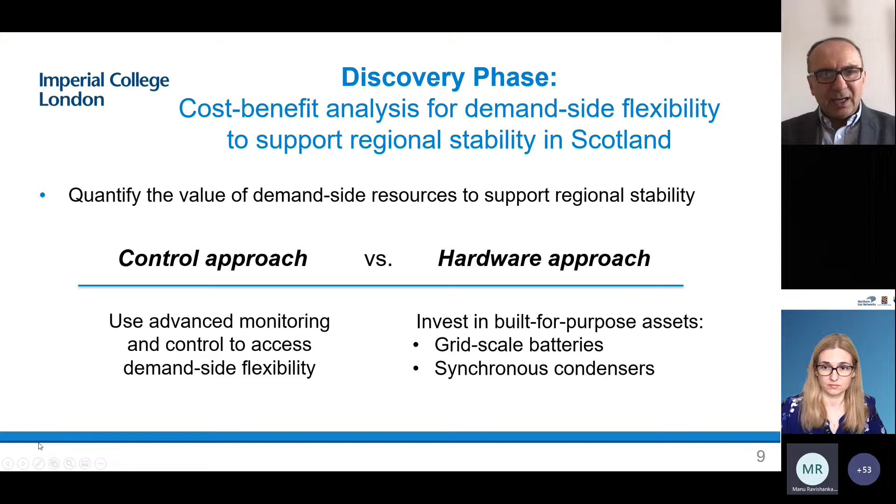So the next slide just shows this - the regional frequency stability.

This is a big issue, and obviously this is also driven by the fact that this is a reduction in system inertia because we've got renewables, and also there's this HVDC connection, and in Scotland this is just an assumption going to be 1.4 gigawatts, and if that fails, then that will be a problem.

You can see at the bottom right these diagrams, the red and blue ones, showing the difference in frequency changes, so they're not the same, and the red one is in Scotland. You can see that the rate of change of frequency in Scotland, if we lose generation or this interconnection, would be bigger than in England, and if we ignore this spatial variability, we would potentially have a higher rate of change, and this could potentially lead to blackouts. This needs to be addressed strongly.

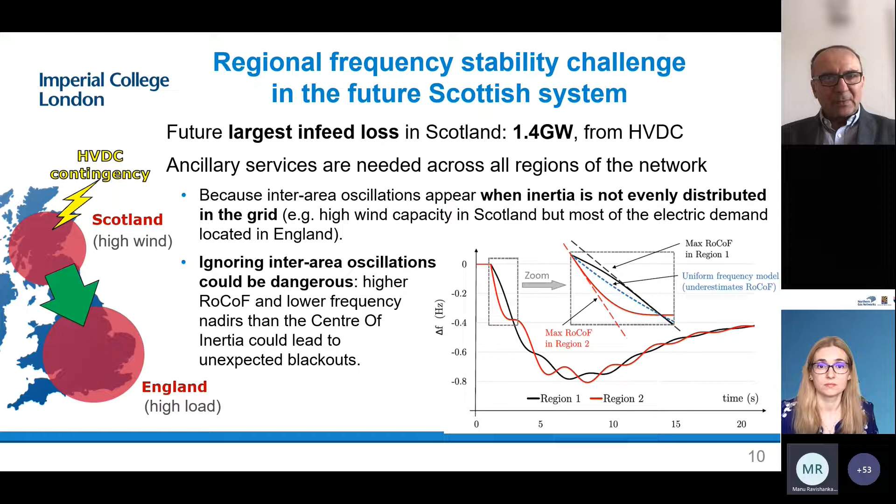So the next slide is just quickly showing that we use our ancillary services constrained energy scheduling model, which is a very advanced modeling approach.

One of the core challenges being solved with this modeling is to optimize the system operation, looking at timescales of hours, because if you want to switch generators on and off, that takes time, but at the same time looking at the ancillary services dynamics, which is a millisecond timescale. Putting this together is where this model is pretty unique.

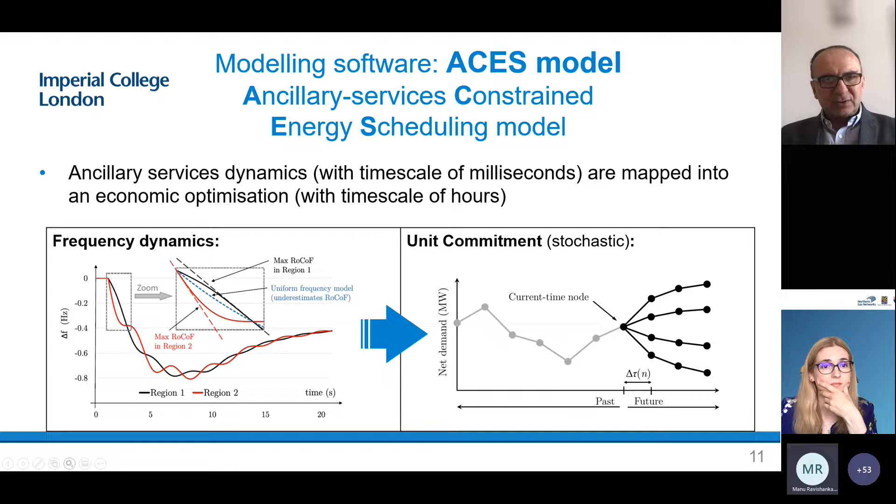We have also updated the model to include demand side response and this spatial distribution of frequency changes. So if we go to the next one.

In this ACES model we have expanded it to include regional demand side response, because that is very important, along with characterization of those. The current profiles consider electric vehicles and heat pumps, and we used National Grid's scenarios focused on 2030, so this was based on those scenarios with the analysis focused on 2030. So we go to the next slide.

This is showing the core results of the modeling. The value of having this fast flex concept in Scotland is about 440 million pounds per year, and that's all to do with, as we discussed, there being less investment in conventional grid, but these are the benefits which this concept can provide compared to synchronous condensers or battery storage, which is, in inverted commas, the conventional approach.

This was done based on the analysis of zero carbon operation in Scotland. We estimated there was about 1 gigawatt of demand response from electric vehicles and heat pumps, and that demonstrated it could replace 10 gigavolt amps of synchronous condensers and 500 megawatts of battery storage, which is obviously very, very significant.

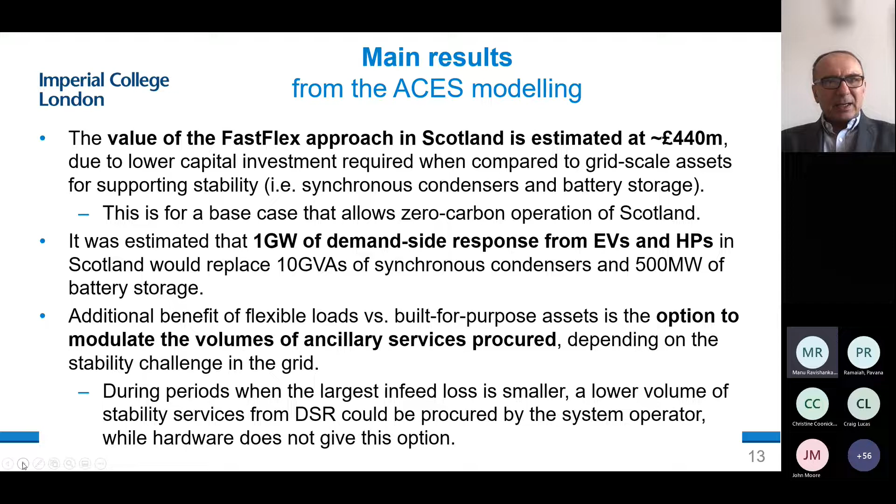This now demonstrates there are very significant benefits, and that needs to be included in the analysis going forward, because that has a very significant impact.

But of course, what was also demonstrated is that the electric vehicles and heat pumps being used for this, we would potentially need much more, because the value, even if you increase it, doesn't reduce, which means there's a significant amount of this required. That's not regarding the options for 2030 alone, which would not necessarily be sufficient to fully guarantee stability, and that's where other concepts need to be included and looked at.

One option is vehicle to grid, because if we could potentially inject power when there's a large loss instantly, that would provide frequency stability, which would be very useful to include.

There are also other loads which could support that, like refrigeration in supermarkets, which can provide some of these services. That's something useful to understand in the next phase of what the fast flex scope would be. The focus is on understanding the benefits of this additional demand and these different options of demand side response, and what the value of those is.

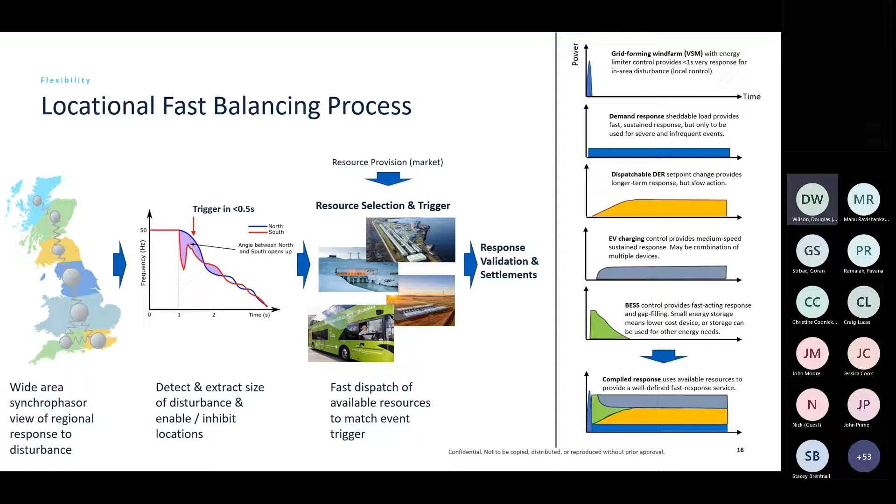There's already a suite of services in place, including physical inertial response, mainly provided by large generators with a lot of inertia, though that's shrinking, which is the source of our problem. There are frequency response capabilities, both traditional and newer forms like dynamic containment, helping to shift the response faster, but those responses don't yet include a locational element into the frequency service, and that's part of what we're doing.

At the dispatch end, slower control using demand side flexibility is used in centralized balancing, but that's quite slow. What we're aiming to do is put this flexibility together with a fast detection and triggering approach, so we defend the system against large losses from interconnections, large generators, or large loads. The focus is this new service applying in the middle, between proportional frequency regulation and dispatching to balance the grid longer term. This is the new service.

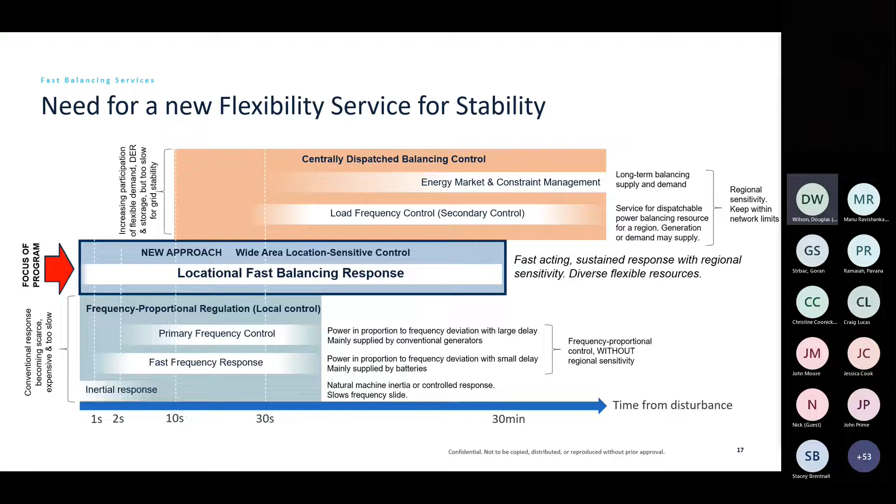So as we look to taking this a stage further, there's an infrastructure that needs to be put in place in order to support the stakeholders to demonstrate and deliver what they're capable of.

In the lower part of this diagram, you have a measurement infrastructure feeding through. These are fast measurements - every cycle, those measurements are brought into an environment where you can run the necessary control algorithms. You then identify the conditions in which you want to draw on the resource, and then you dispatch the response to the participants.

Those participants are mainly connected in the distribution network. They're mainly relatively small units, but together you can aggregate it to a substantial response.

So as well as that technical path, there is also a system level view of how much response is needed. If you treat the overall response as a block of response available for responding to, for protecting the system against disturbances.

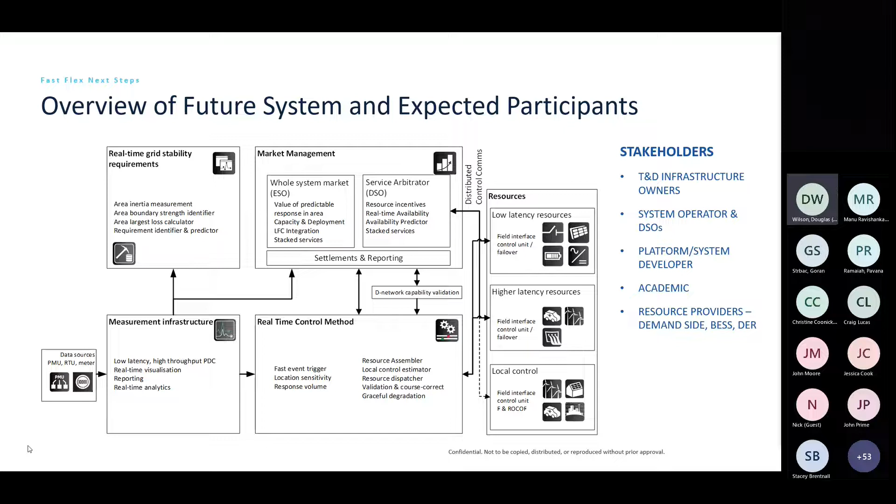So I'll stop here, and happy to take questions when that time comes. These were backup slides, so you don't need to go into those.

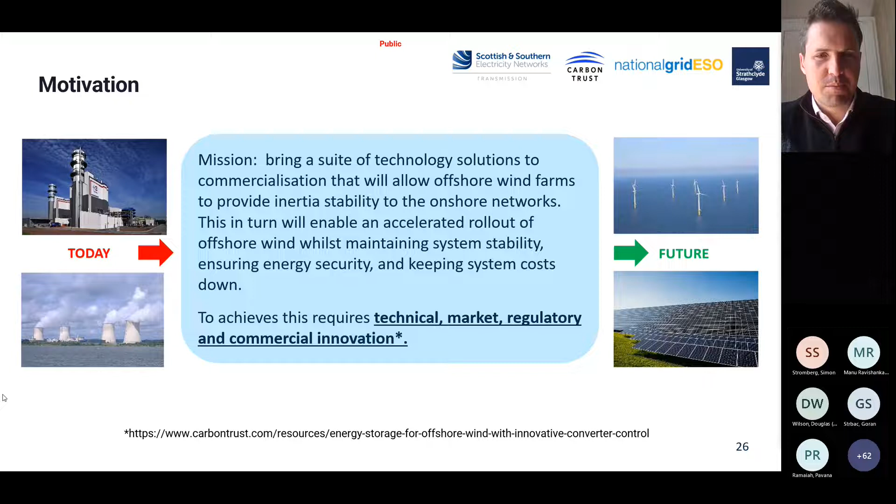Yes, next slide. You might want to just click through to populate this. I didn't realise I wasn't going to be in control.

So the first stage was to generate a long list of potential technologies. These were really every kind of technology that could be used in conjunction with an offshore wind farm to stabilise the networks, and in particular we were looking at inertial stability. What we did with this long list was then qualitatively produce a shorter list, ruling out some that were potentially of less interest for this project. They might be very interesting in other contexts, but this project is focused on the relative short to medium term in terms of allowing offshore wind farms to provide additional services to the grid.

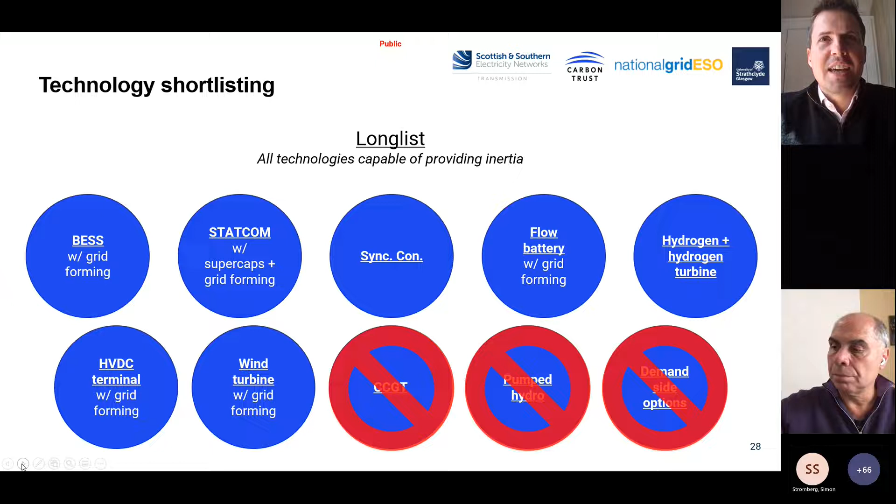So I'm going to click through. Yes, combined cycle gas turbines went, pumped hydro went, demand side options went, as did hydrogen and hydrogen turbines and flow batteries, all deemed not to meet one of those criteria.

If you click through to the next slide, you'll see that left us with the shortlist for assessment and discovery. Maybe just talk to those briefly. There's battery energy storage with grid forming, to be located at the onshore substation. There's STATCOM with supercapacitor plus grid forming capabilities, again located at the onshore substation. There's an HVDC terminal with grid forming capabilities to replace a traditional HVDC terminal for an HVDC connected wind farm. There's a wind turbine with grid forming technology to replace existing wind turbines offshore, and also a synchronous condenser to be located at the onshore substation. So these are the 5 technologies that we really focused on in discovery and continued with the analysis.

If we go to the next slide, I'll talk you through the conclusions from the 3 work packages. As mentioned, the first work package was the CBA, looking at the commercial models or commercial case for these various technologies. We took a consumer perspective for the 5 technologies, and considered the costs and benefits on an energy system level as a whole. Each technology was assessed at a nominal 50 megawatt size, selected for convenience and comparison purposes, and the timescale for the assets was taken as 25 years.

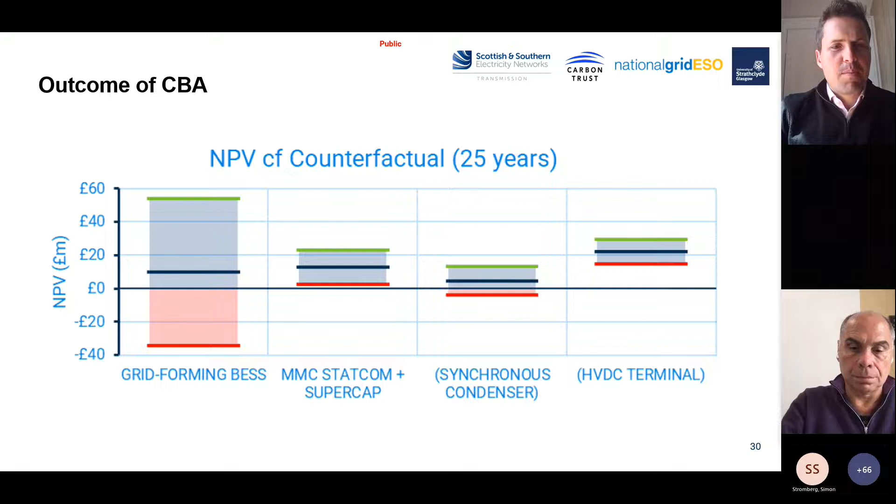If we look at regulated network company ownership, battery energy storage with grid forming at the location of offshore wind farm connections, so the onshore substation, produces some relatively significant regulatory barriers in terms of ownership of the storage asset.

Similarly, with the STATCOM with supercapacitors, there are some regulatory complexities, although potentially less so than battery energy storage. We need some clarity as to how those assets could be defined for regulated network company ownership. For synchronous condenser and HVDC terminal, the view from discovery is that there's quite low operational and regulatory complexity to be owned by a network company. In terms of the wind turbine, that's obviously not feasible to not be owned by the offshore wind farm owner.

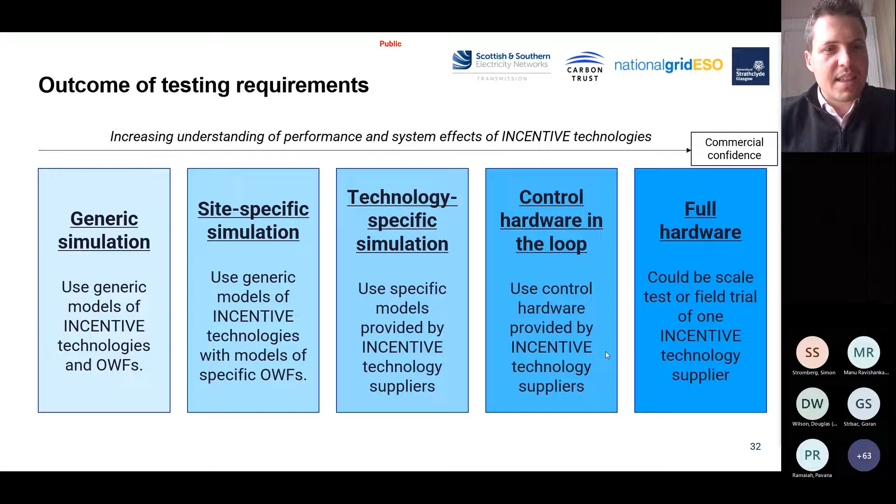The first is the commercial assessment, and what that's going to be doing is bringing together the CBA work and the ownership model work that I discussed earlier from Discovery. At the moment, due to timescales, they were done relatively independently from one another. But what we really want to do, in order to commercially assess these technologies properly and thoroughly, is to bring those together - so look at a CBA given a specific workable ownership model, for instance.

The second work stream is to go through the technology testing, the testing regime that I just outlined. How far we get through that in Alpha remains to be seen, obviously, but we will see where we get to, and the remaining steps can be carried on in Beta.

And on that note, the third main work stream is to conduct scoping activities for Beta. Obviously any kind of Beta demonstration will take significant effort and time to set up, and I think we want to have that running as a dedicated work stream in parallel with the commercial assessment and the technology testing, to make sure that by Christmas time - although I hate talking about Christmas already - we will have enough time to really consolidate everything we've done in Discovery and Alpha so far and come up with a suitable Beta scope that's achievable and also impactful.

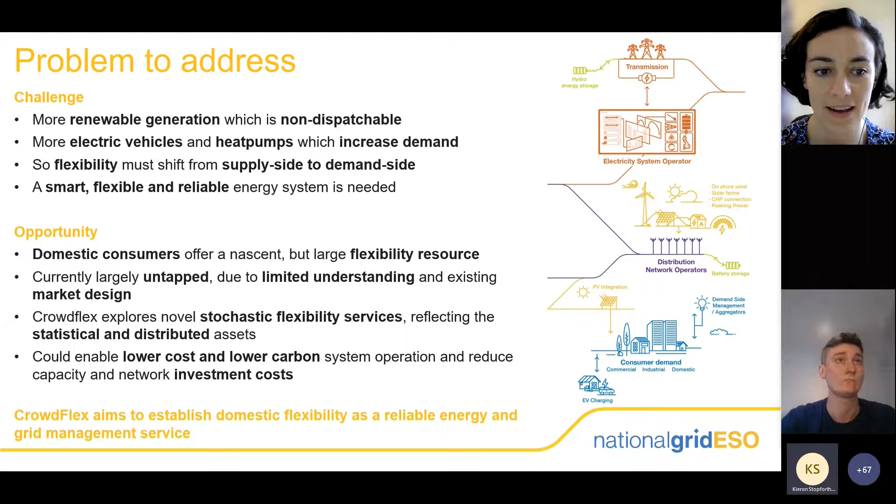So overall, CrowdFlex aims to establish domestic flexibility as a reliable energy and grid management service. Next slide, I'll give a quick overview of the CrowdFlex project now.

There are three main objectives. The first one is to understand and align the ESO and DNO requirements for flexibility services, and to consider how they can interact with the statistical nature of these domestic flexibility assets.

That's stream one. Stream two is all about a real-world trial. What we'll be doing here is identifying the technology capabilities and also the consumer behaviour parameters that we can explore together in a real-world trial.

The third stream is all about modelling. Here we really want to understand how the statistical nature of flexibility can be developed into a reliable modelling of domestic demand and domestic flexibility.

So those three objectives we're going to be developing through three different phases of work, subject to future SIF funding. We've now completed the discovery phase to assess the feasibility of these ideas, and it looks like we're on to good and useful work here.

So what we've proposed is for Alpha to then do further work designing that future trial and designing that future model. And then finally in Beta, if we get the funding, then we would actually undertake that trial and develop and deliver that model.

So overall, to give a sense of scope for CrowdFlex, the kind of technologies that we're working with are all domestic assets. We're looking at automatic as well as manual operation, and we'll be looking specifically at EVs, heat pumps, and also general flexible white goods.

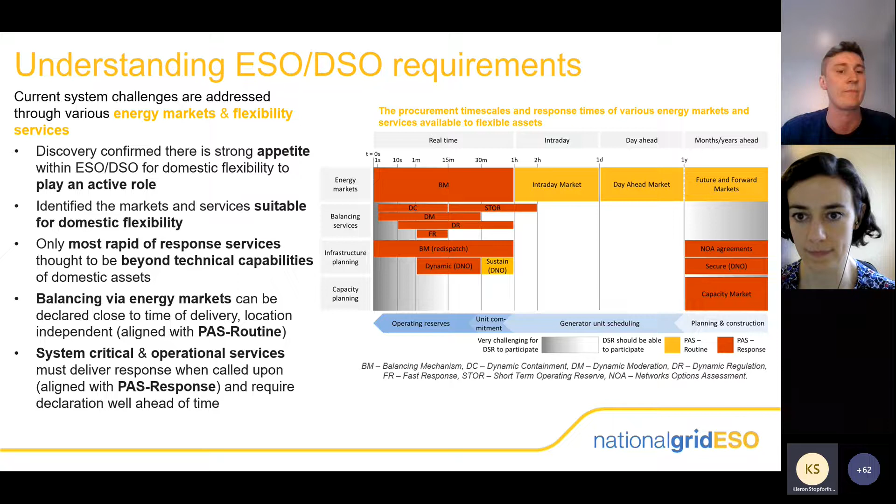Thank you. Discovery then went on to lay out the parameters and dimensions required for a successful large-scale trial of domestic flexibility, based on these two categories of flexibility services. For PAS routine type flexibility services, a trial must produce a time-wise vector of baseline demand overlaid by the expected flexibility capacity for each time interval throughout the year. That's because flexibility will vary throughout the day and seasonally, and we need to understand those impacts on what we can provide.

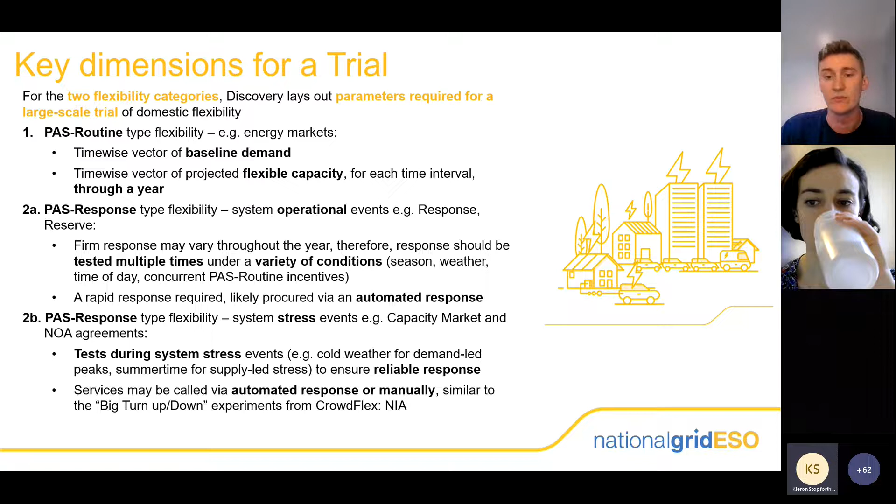Then we have the two PAS response type flexibility services, and these have subtly different requirements. For system operational events like response and reserve services, we need a measurement of firm capacity, but that firm capacity can vary throughout the year as it enters different sections of those services, so we need to understand how firm capacity might vary under different conditions.

The second is the system stress event, and this needs to be conducted specifically during those stress events to understand how domestic flexibility might be able to respond when called upon in a real world situation. An example of this is understanding how domestic flexibility could enter the capacity market and then provide the service during a cold weather peak.

I think now we'll move on to understanding the modelling of flexibility, and for that, I believe I'll hand over to Kieran. Thanks, Freddie. Hi everyone, Kieran from Octopus Energy here.

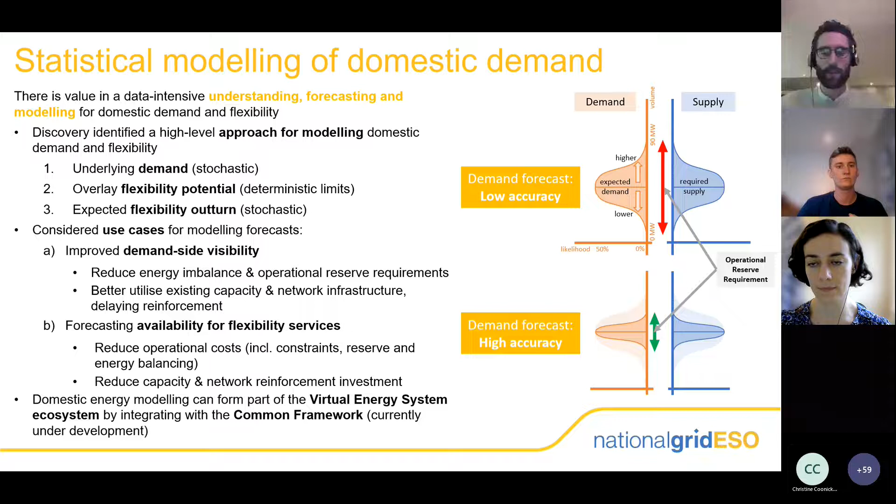In addition to understanding the physical operation of domestic flexibility assets in existing and future grid services, what is also required is a complete evolution in the way people understand domestic flexibility as an asset. One of the critical tasks for the project was to build out that understanding around what really is domestic flexibility, and how do you model it and forecast it?

As we've covered already, domestic flexibility is a very different type of asset to others. Traditional generating assets are point sources, highly controllable, very predictable. But domestic flexibility is typically a distributed, heterogeneous type of asset, there's variability, and it tends to be incentive-led or low-level automation-led, instead of a big power station that you can tell to do whatever you want, and it pretty much does that.

So what that means is it's a much more probabilistic type of resource. You have a distribution of different probabilities associated with all of these different outcomes. And that means we have to do more work as flexibility providers, and probably on the National Grid side too, to understand, at any given moment in the day or year, how much flexibility are you going to get and how certain can you be that it will show up?

So what this means is, looking along the piece, you need an evolution in the skill sets and capability to drive this to greater adoption. That includes things like better forecasting of demand and flexibility, figuring out what your forecast error is, figuring out how to settle that, and then understanding from a grid operations point of view how to ingest all of that information. So in Discovery, we looked at a high-level process for forecasting flexibility.

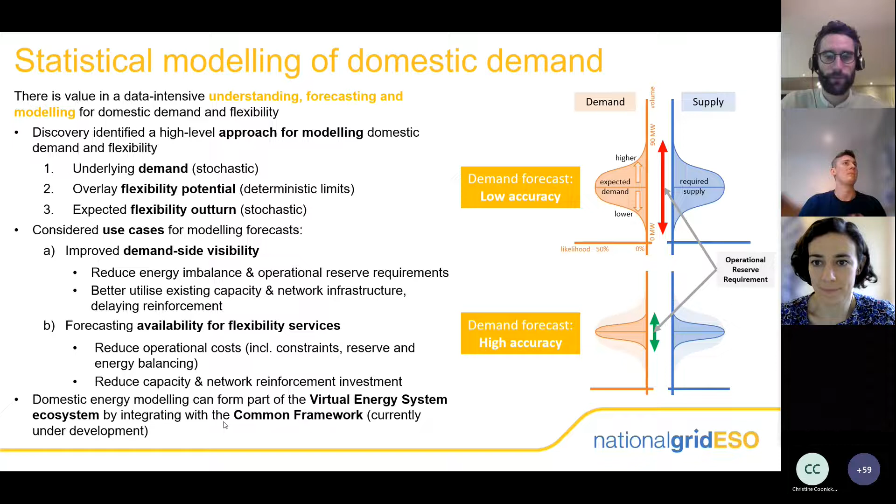Thank you, yes. This final part is just looking at the stochastic delivery of flexibility services. At the moment they're procured through a declared firm capacity. However, domestic flexibility is inherently stochastic, which means you have to derate your capacity in order to provide flexibility with a certain probability, and that's what we're describing in this graph on the right.

It leads to the fact that the ESO, or whoever's procuring this flexibility, needs to over-procure flexibility because they're derating every single set of portfolios.

However, if you could describe flexibility stochastically via a probability density function, then you could balance the under-delivery from one portfolio with over-deliveries from others, or increased visibility from other possible system changes. This is another area we're hoping to look into in Alpha, because by doing this you would be able to eliminate the need to derate capacity.

You would be able to reduce over-procurement, and through that provide system savings for all stakeholders, including the consumer, the ESO, and the suppliers and aggregators who are pooling this portfolio of domestic flexibility.

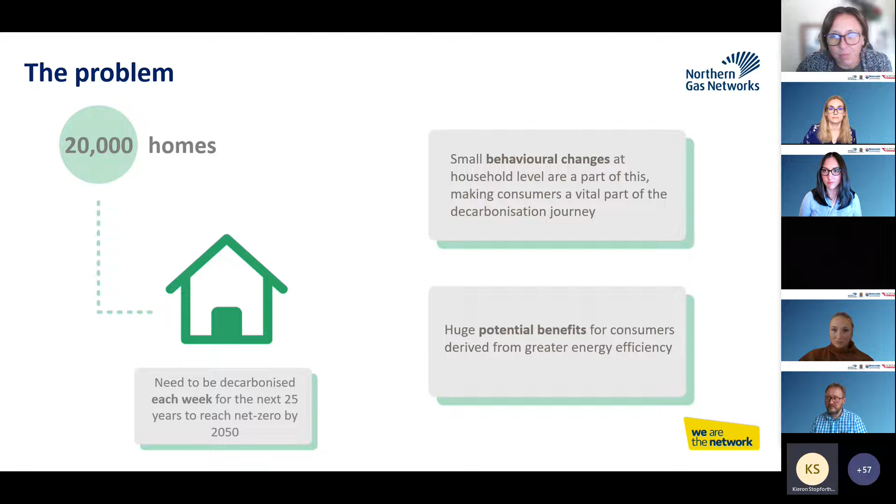So now I'll hand over to Diana to talk about the methodology and the framework produced in more detail. Next slide, please.

But first of all, we met up and we defined the research questions. So we're very much interested in finding out which are these key factors that influence technology, smart technology adoption among consumers, users of all kinds, including those that are low income and vulnerable. And we are also interested in finding out specifically which are the barriers, which are those challenges that stop this adoption by all typologies of users.

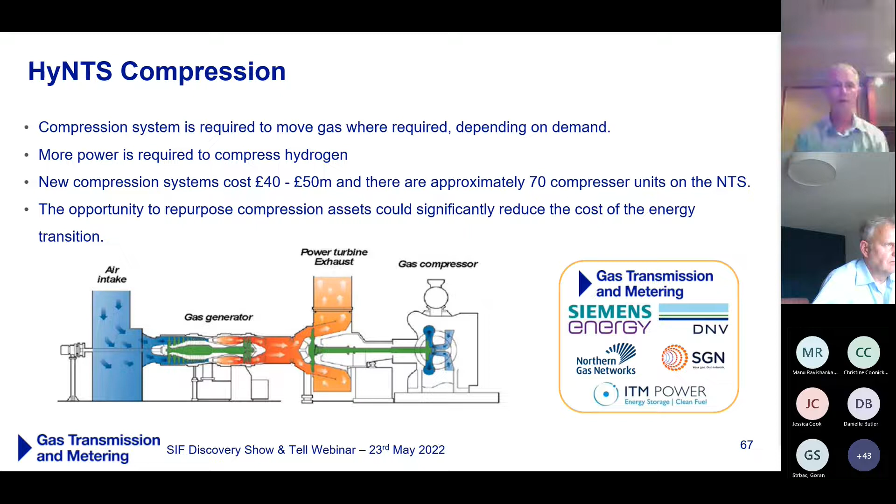The project has included partners from Siemens Energy, DNV, Northern Gas Networks, SGN and ITM Power. Next slide, please.

Work packages 1 and 2 were the responsibility of Gas Transmission and Metering and included project management and the development of project requirements. The requirements developed included assessing potential locations for a demonstration and defining the operational parameters of the demonstration.

Work packages 3 and 4 were the responsibility of Siemens Energy and focused on the feasibility of repurposing existing compression assets for use with hydrogen, where work package 3 focused on compression drive systems and work package 4 on the compressor itself. This included consideration of the impact which gas blends may have on the compressor and the potential for variability in gas blends.

Although the main aim of the project was to repurpose existing assets, alternative options for the drive systems and compressors were also considered to ensure the most cost-effective, technically feasible option was chosen for demonstration.

Lastly, work packages 5 and 6 were led by both National Grid and DNV, looking at the feasibility of building a compression facility at the Future Grid DNV test facility. This included defining all of the equipment required for the compression, assessing the volume of hydrogen required, and the temperature effects which a compressor would have on a 1 kilometre pipeline loop.

An initial transportation feasibility assessment has also been undertaken, as very large, very heavy equipment will also need to be transported to the site for demonstration, and data was also gathered to begin to inform what the testing requirements for that demonstration might be.

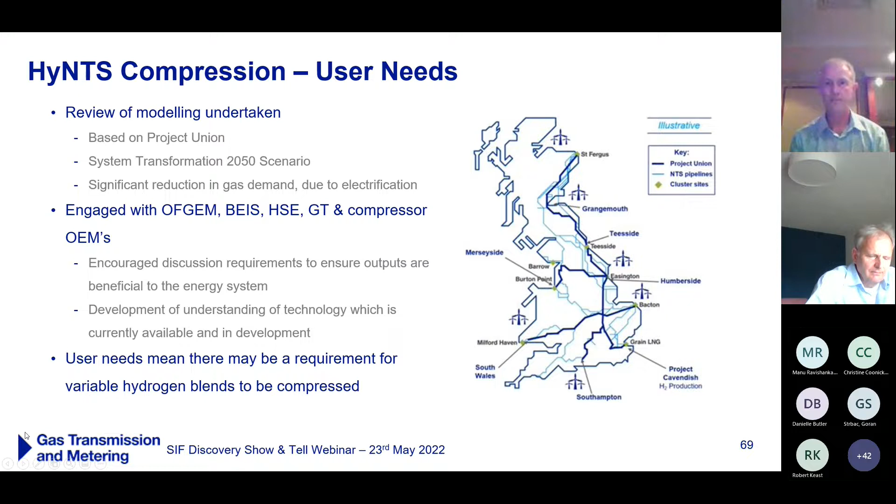Thermodynamic and material assessments were undertaken for 2 compressor units. They have the potential for a hydrogen modification. The compressor and turbine performance were checked for blends with 20 and 50% hydrogen and for pure hydrogen.

The table shows the difference between inlet and outlet pressures. The differential pressure decreases for higher hydrogen contents. If the compression values for the 20 and 50% hydrogen blends can be accepted, there is a potential to reuse the natural gas compressors for the new hydrogen conditions.

We will look into the next phase to check mechanical limits and will specify required modifications.

For the compression of pure hydrogen, you can see that a pressure increase of only 1 bar was achieved for the Dresser compressor and 1.3 bar for the De Laval compressor. Both are not sufficient for pure hydrogen. A new concept is required. The assessment shows that the De Laval compressor was the most suitable one for re-engineering for the lower hydrogen blends.

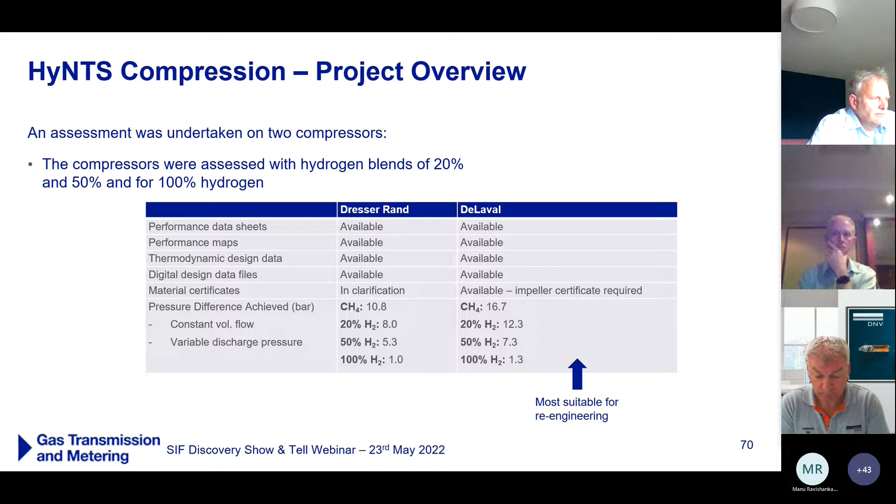A new, more powerful compressor design was created for pure hydrogen. The number of impellers in the flow path was increased from 1 to 4. To reach the necessary higher operating speed, an additional speed increasing gear was implemented. This hydrogen train achieves the same pressure ratio as the original design for natural gas.

This high head design was recalculated for variable hydrogen blends. Gas compositions with 80 down to 60% hydrogen were possible within the speed range of turbine and compressor. After thermodynamical design of the compressor, the suitability of the gas turbine was checked.

Siemens Energy and Avon gas turbines have the potential to run with hydrogen. The assessment found that the gas turbine can provide the power for the compression of 20 and 50% hydrogen blends, and pure hydrogen. The completed discovery has shown that there is high potential for installed rotating equipment on the National Transmission System, NTS. This could provide significant cost savings.

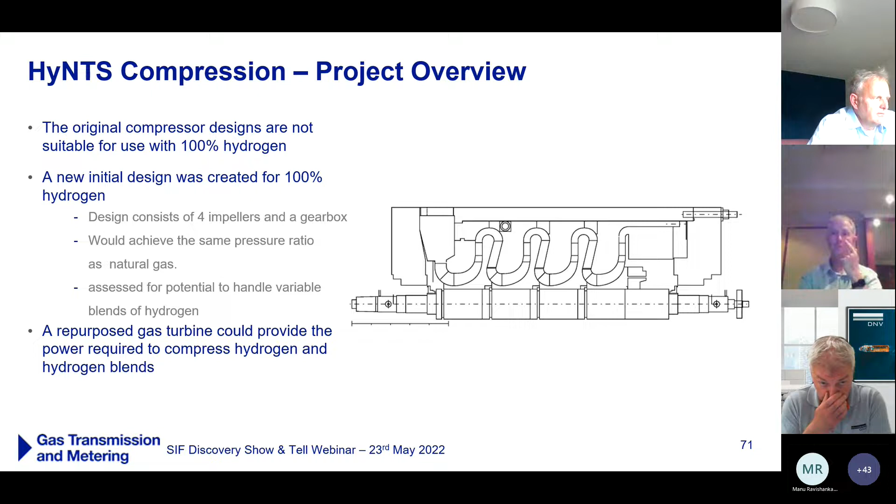We will refine this in the alpha phase. Next slide, please, and we'll transfer to another speaker.

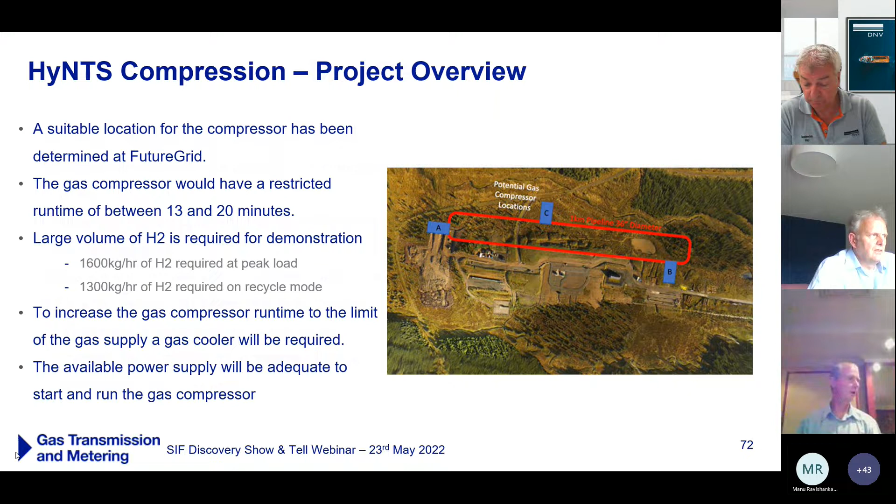Okay, next slide. This is fine. Gas turbines with hydrogen could eliminate the carbon dioxide footprint at compressor stations. Compression is required to build line pack for energy storage and for transportation.

In a hydrogen future there will be various fluctuating hydrogen production locations. Storage in NTS pipelines in times of low demand for use at peak demand will balance the future energy network. There are approximately 70 compressor units in the NTS, which would cost approximately 40 to 50 million pounds.

From the discovery phase, we have found that it may be feasible to reuse existing compressors for hydrogen blends up to 50% in a constant volume flow scenario, and that around half of the existing gas turbines could be operated with hydrogen fuels. This could significantly reduce the cost of the energy transition.

In the alpha phase, we will develop the benefit aspects further. We will find out which equipment could be reused, and we will specify the requirements for the new hydrogen equipment. Thank you. Maybe next page.

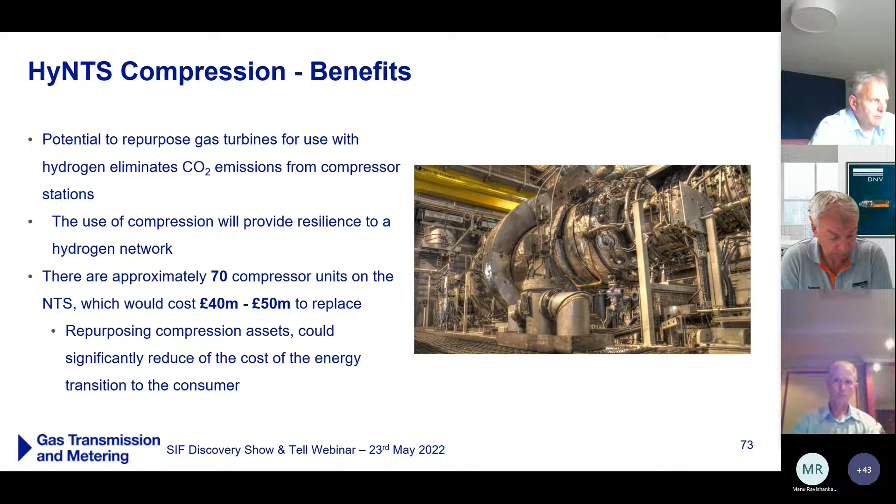So in the next phase of the project, we would like to undertake further modelling of the potential future energy demand scenarios. National Grid Electricity Transmission will be joining the project as a project partner to help understand the potential interactions between future gas and electricity systems.

Siemens Energy will develop conceptual designs for the modifications required to the gas turbine compressor system for compression of hydrogen, as well as develop a conceptual design for the 100% hydrogen compressor. DNV will assess the requirements for additional storage on site to enable us to fuel the gas turbines with hydrogen, and also refine the transportation feasibility assessment to develop a detailed transport plan. Conceptual design will be produced for the demonstration site, ready to begin detailed design for the beta phase if successful. Thank you.

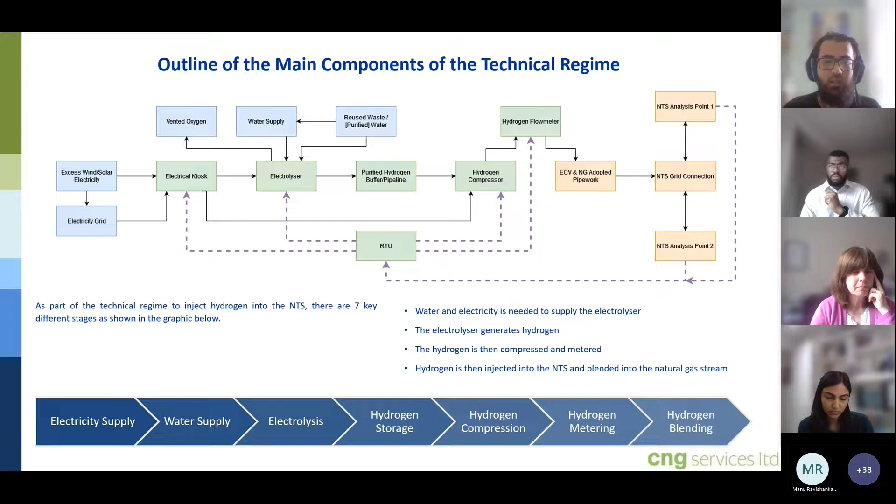The way we did this project is we spoke to individual suppliers and manufacturers of each individual piece of equipment. We worked with National Grid, SSEN, and all these companies to develop a technical regime that can take us into the alpha.

Just to give some generic conclusions of what we found: it is feasible to inject hydrogen into the NTS currently. The 0.1% limit is not a barrier. We can inject 200 standard cubic meters an hour of hydrogen into the injection. It is also technically feasible individually, on an equipment level and in terms of consent. The 100% hydrogen pipeline will be owned by National Grid, and there's no specific GSMR changes required, as that hydrogen is going to be blended into the NTS.

As mentioned previously, there are 4 NTS feeders in Scotland. The flow capacities are above 200,000 cubic meters an hour, which falls within the range where we can start injecting hydrogen, as an example.

One of the key requirements for the project is we need to know exactly what we're injecting into the NTS. Even though we know we're making hydrogen in the electrolyzer, we need to know what's in that remaining fraction, say we produce hydrogen at 99.999%, what is that 0.001% that's going in? So we spoke to manufacturers and identified what the contaminants may be and what contaminants can come from the compressors, and identified that yes, it is possible. The contaminants we are looking at, for example lubricant contaminants from a compressor - we can get oil-free reciprocating and diaphragm compressors, which are currently used for hydrogen. It is a bit of a challenge to get small compressors at the scale we are looking at, but yes, we can get compressors with zero oil contamination to get ultra pure hydrogen injected into the NTS.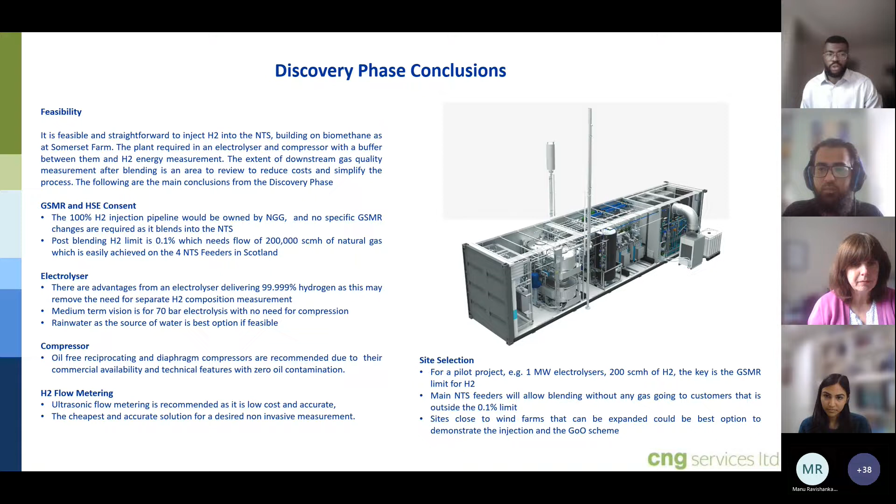I'll give a brief overview of some of the key insights from the Element Energy related work streams.

The first part of what we did was to generate several different electrolyzer connection arrangement scenarios, which differed with respect to the primary and secondary power sources connected to the electrolyzer, the level of grid connection arrangement, and the battery storage, whether or not there's battery storage, and also the capacity of battery storage used. These were then modeled for a range of different electrolyzer capacities from 1 to 35 megawatts.

It's acknowledged that beyond a certain electrolyzer capacity we'll be close to breaching the GSMR, the current GSMR limit, but this was more just a proof of concept for the different range of electrolyzer capacities that we considered.

So then, for these scenarios and capacities, we ran a techno-economic analysis where we generated what the levelized cost of hydrogen production was, as well as the load factor for all these different scenarios and capacities.

We found that an electrolyzer connected in a 1:4 ratio relative to renewable energy supply benefits from having the lowest levelized cost of hydrogen production, basically because it has a reasonable load factor and lowest cost of components relative to its hydrogen production.

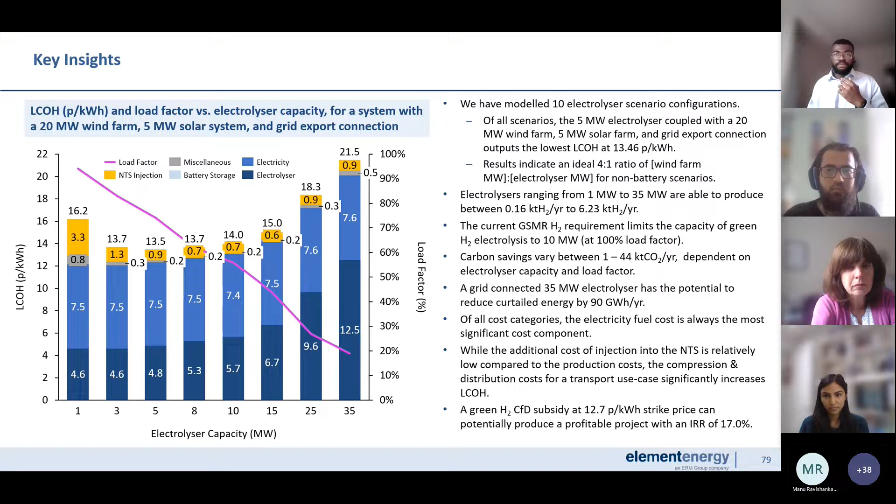Hopefully that looks better as battery costs lower over time. What we did find was that our best performance scenario was a 5 megawatt electrolyzer connected to a 20 megawatt wind farm, a 5 megawatt solar connection, as well as the potential for exporting the excess renewable electricity to the grid. That produced a levelized cost of 13.46 pence per kilowatt hour.

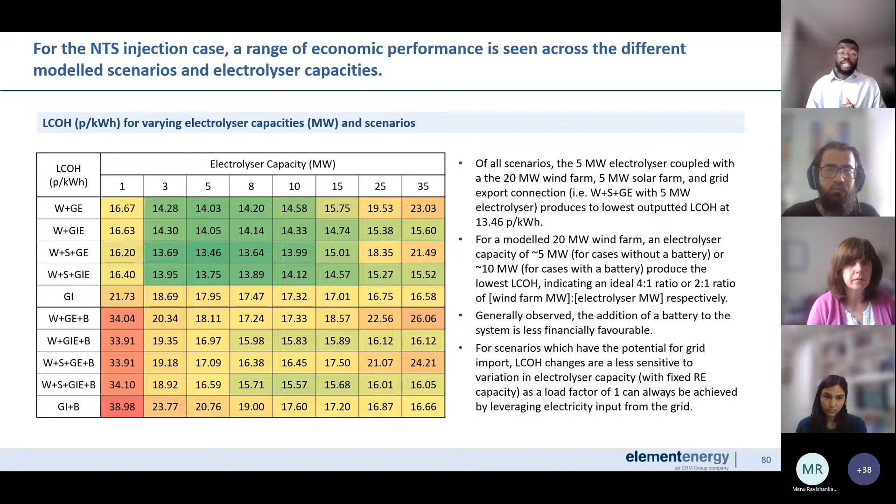If we go to the next slide.

Lastly, we performed a sensitivity analysis on several key parameters, namely the electrolyzer capex and efficiency, the electricity cost, the battery cost, the capital structure, and whether or not there's curtailed renewables use.

Using the best case for all these parameters, we were able to reduce our LCOH by about 27% to 9.8 pence per kilowatt hour. That was relative to our hypothesized base case parameter values.

So even with a less favorable CFD strike price of something like £4 per kilogram, you could still have a profitable project. So basically, our main finding from the discovery phase is that there are some configurations of green hydrogen production that have a reasonable cost, but producers will only consider such a project with enough policy support.

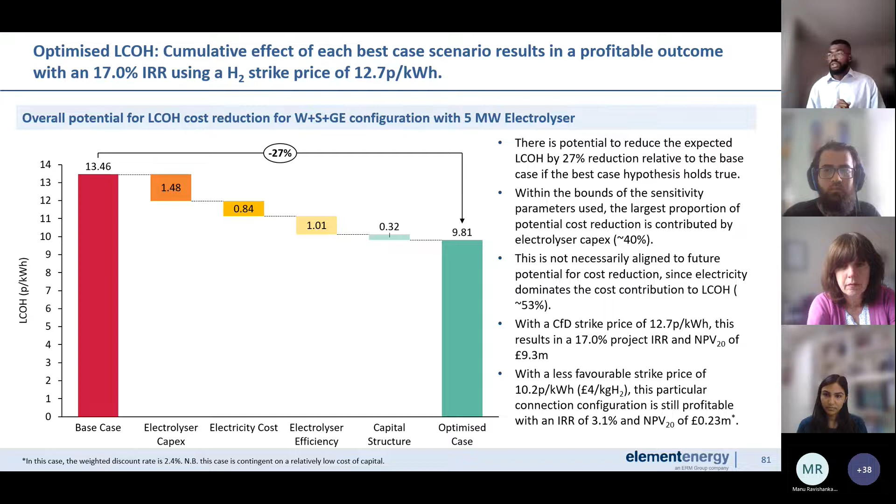And with that, I'll hand over to Centrica, who will give us the commercial aspect. Great, thank you.

So Centrica's contribution focused around the offtake of hydrogen to customers. For this, we had some preliminary discussions with customers to gauge their interest in purchasing hydrogen from the grid, and there was a clear interest in them gaining more clarity on how they could do this.

One thing that came up in our discussions was the importance for them to understand the origins of the hydrogen production, as well as identifying the carbon reductions that the hydrogen could provide them.

From this, we concluded that it was important that there was a robust certification process in place to provide the customers with the confidence that they needed to offtake the hydrogen. To help with this, we provided an overview of the verification process needed to produce a hydrogen certificate, along with an outline of the associated greenhouse gas emissions. We drew comparisons from the biomethane sector and their certification process to do this.

Another thing that came up in our conversations with the customers was that it was important that this solution was similar to the cost they would be paying for natural gas, along with current decarbonisation solutions. So, for example, the cost of a biomethane certificate or a carbon offset credit.

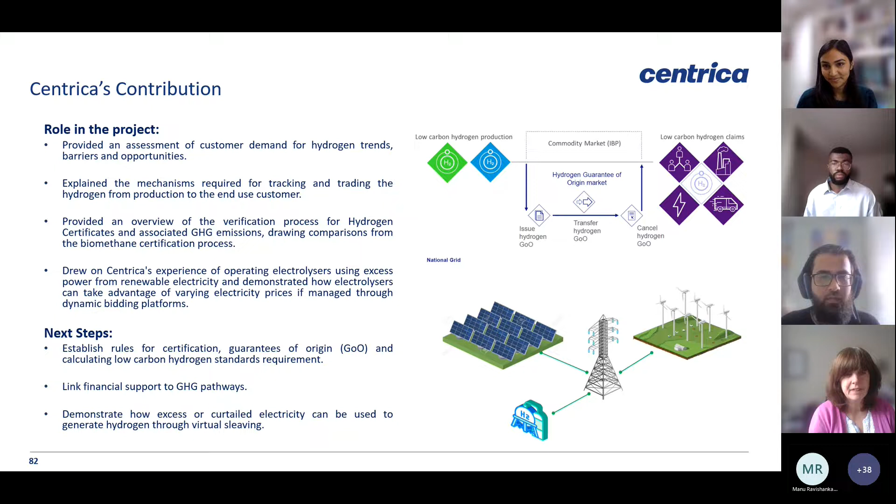To conclude the project, I think we all enjoyed this project. We all want to take this project into the alpha phase. This includes Element Energy, Centrica, us, National Grid Transmission, SSEN. We spoke to numerous people, and there are additional people who want to support the project into the alpha. This includes the Renewable Energy Association, Gasunie Germany, who have completed a similar kind of project in Germany, and there are numerous UK consultants who wish to join.

To summarize the work streams, we want to take the engineering into the next step, which is the FEED study. Prior to that, we'll work on the specification limit for H2 into the NTS, so the 0.1% limit, and build upon that, do a FEED study, and then from there identify a pilot site and start producing some FEED layout drawings for an injection.

To support all of this work, naturally we will have a commercial regime, which Tara briefly spoke about, and financial support for H2 injection, which Element Energy, I believe, will head.

For Workstream 6, we're looking at a specific area north of Dundee in the SSEN region for strategic investment of hydrogen. There's quite a few investment opportunities there that we can make use of, and that's what we'll be doing in Workstream 6. So hopefully, I hope you guys enjoyed this presentation. Thank you for listening.

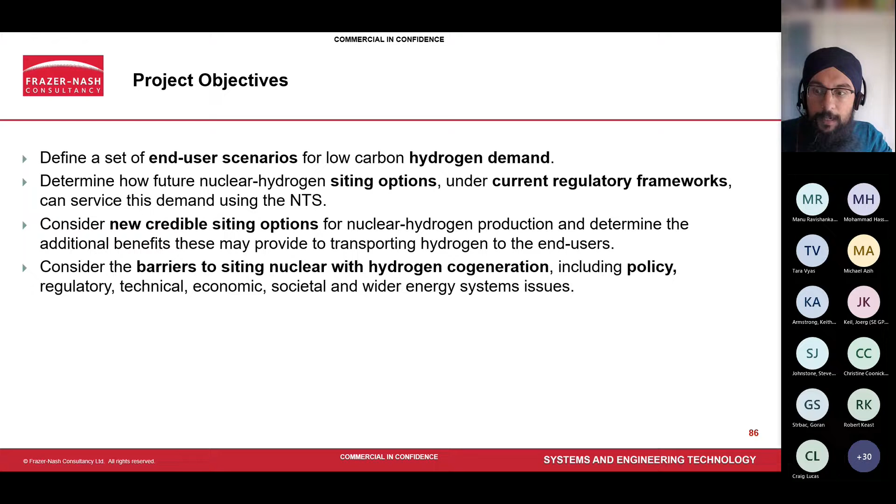So the first part of the project was to essentially forecast the hydrogen demand. Colleagues previously have used the FES scenarios. We've decided to use the BEIS hydrogen strategy, and we ended up generating 4 scenarios in terms of both the timescales of 2035 and 2050, and 2 different demand profiles.

So the low demand essentially corresponds to an increased electrification across the UK, so homes heated by heat pumps more excessively, while the high demand essentially has more commercialization of hydrogen boilers, plus an increased demand in terms of hydrogen required for synthetic fuels around aviation requirements.

And we've been able to show where that demand will be required. So the eagle-eyed among you would have noticed that in the high demand scenarios, a lot of them are clustered around some of the current industrial clusters. And we've got transportation and aviation near London as well. Could that be hydrogen fuel cells as well for cars and for buses?

So we generated our demands, and they would support our future modelling assessment, which I'll come on to in a few slides. Next slide, please.

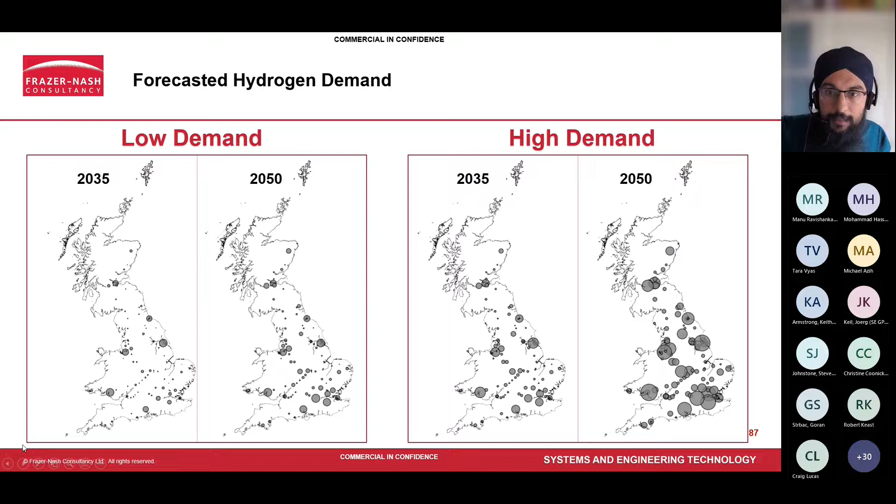We then engaged stakeholders around the barriers that they perceive. So we split our stakeholder group into 2 sets: those of the nuclear technology community and those of the transmission community. We surveyed over 20 participants for each industry, both giving various different views on it.

So from the advanced nuclear technology perspective, the biggest and most important barrier that faced them was economic. They didn't see any sort of policy blockers or societal blockers as much as economic being the most important case.

For the NTS, it was more the technical. So how could you connect a nuclear power station or generate hydrogen to the grid? So then that comes down to the demand profile that could be generated that's required, plus the type of hydrogen that can be produced.

So we engaged with a couple of advanced nuclear technology vendors, UK SMR and Urenco, to understand the hydrogen they can produce in terms of high, medium and low. And we used that in our network modelling to then assess the technical barrier there.

Another couple of things that came out from the discussions was that policy was also quite important across the board. So the policy steps in terms of both regulatory engagement between BEIS and Ofgem about who would oversee such a facility, and also in terms of the framework for how best to engage with a plant that could generate both electricity and hydrogen at the same time, so that those plant developers could be suitably reimbursed for those capabilities. Next slide, please.

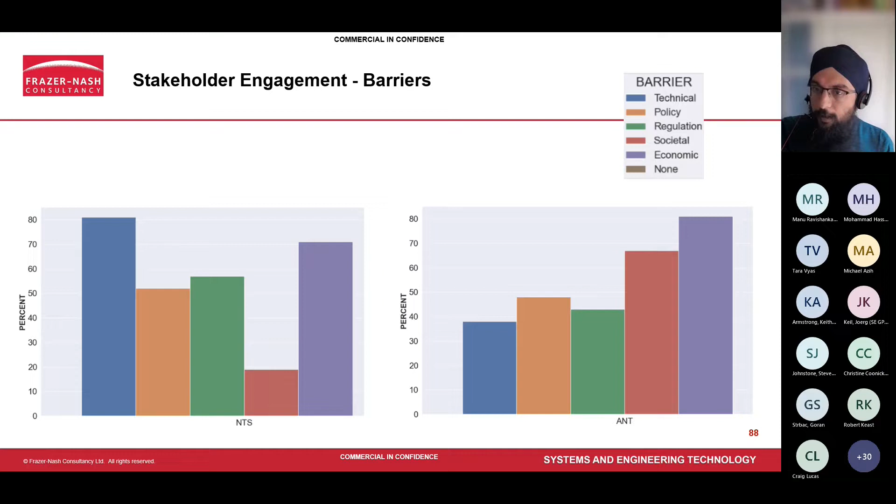So our network impact assessment essentially focused on the ability to use the current NTS to firstly provide the required demand in various areas, and secondly would look into whether the application of an advanced nuclear technology providing hydrogen, what impact it would have on the network.

So it's worthwhile just starting off by saying that we've defined, based on the flow rate requirements and peak flow rates, what each part of the network could actually deliver. So the demand is based on the BEIS hydrogen strategy demand that I outlined before. The supply is limited by the network in terms of the flow rates that it can provide, based on the geometry of the pipe currently.

So it gives us some confidence that the current network would be able to provide at a high level. It looks like it can provide the framework needed to meet the demand, the supply required to meet the demand. We then added the flow rates of hydrogen that could be provided by an advanced nuclear technology to see the impact it would have.

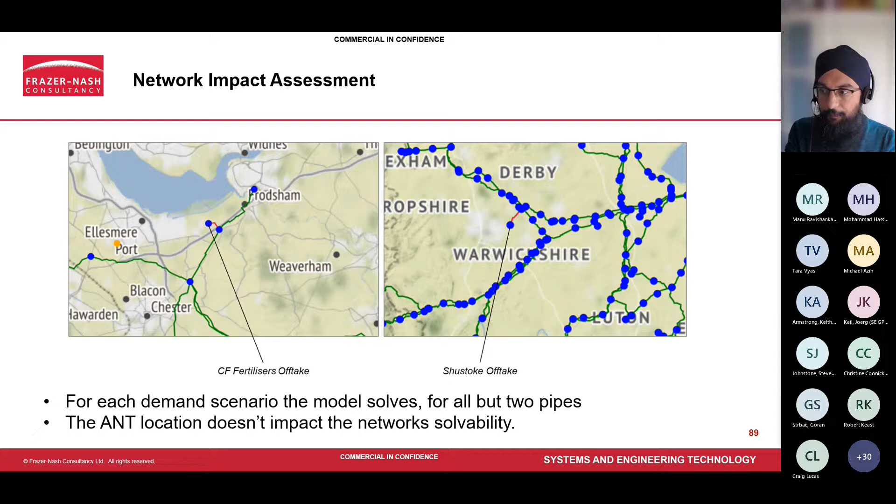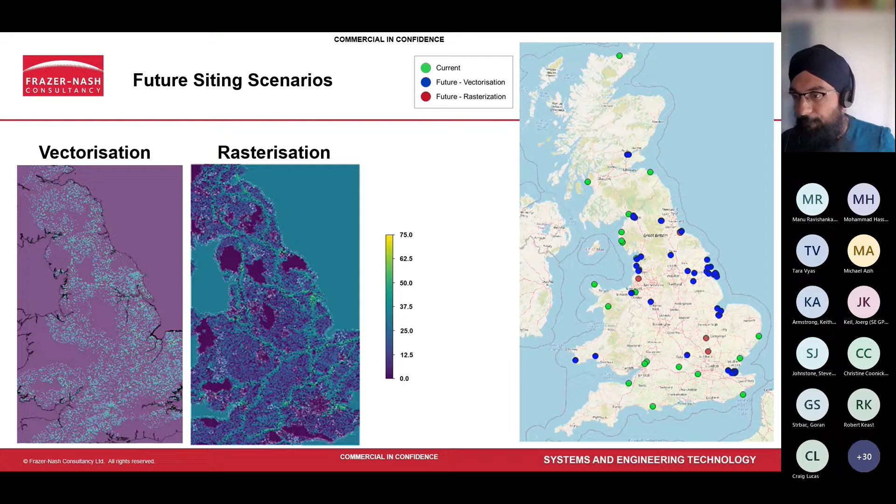Okay, so just to summarize some key points on the project. In terms of the requirement for hydrogen in the future, the obvious candidate to adopt hydrogen at a 100% level would probably be the most energy intensive industries, based on our survey. When we surveyed various clusters, they seemed most keen to use hydrogen due to the fact that they are going to be quite difficult to electrify.

Based on the analysis we did for siting, Teesside, Humberside and Merseyside are actually close to sites that are potentially suitable for nuclear power stations in the future. So that provided a good conclusion in terms of where you could site advanced nuclear technologies in the future, and there'll be a requirement for them.

The network impact analysis, in terms of demonstrating that advanced nuclear technologies wouldn't be disruptive to the ability to discharge the hydrogen produced, didn't show any barriers. As noted by our previous colleagues, there needs to be more work done in understanding the role hydrogen can play in the network and how you would distribute it - work on compressors and optimizing them in terms of where they need to be, compared to where the demand is and where the supply is. So there needs to be more network modeling done there.

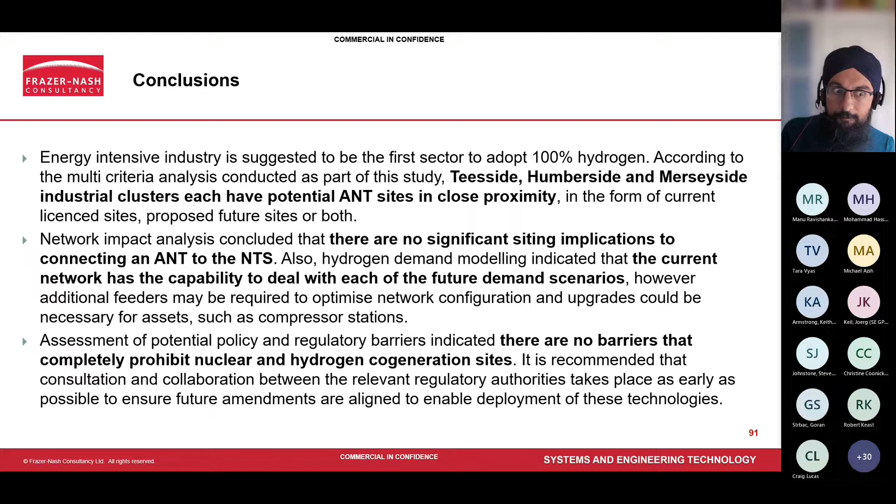So maybe we'll just start with the HyNTS compression project, and I'll work my way through the projects, and we'll see how many we can get through.

First of all, do you assume hydrogen blend volumes are similar to the current natural gas, or significantly lower in the future? If lower, does the system need as much line pack storage, hence the current National Grid pressure levels, or could a smaller demand live with lower pressures?

Yeah, I've got a bit of a quick answer for that one. As part of the HyNTS discovery project, we modelled under the future energy scenarios, just one scenario. As part of the alpha phase, we're looking to branch out and do some more modelling scenarios, and we'll answer that exact question. So it's a good question, and we'll be answering that in the alpha phase. Thank you.

Thank you, Stephen. So if I move to the green hydrogen injection project - if you only use curtailed electricity, does this not decrease the utilization of the electrolyzer and hence increase its capital cost?